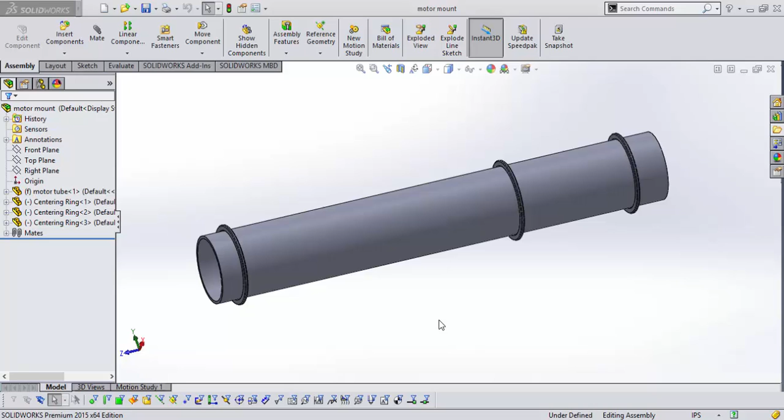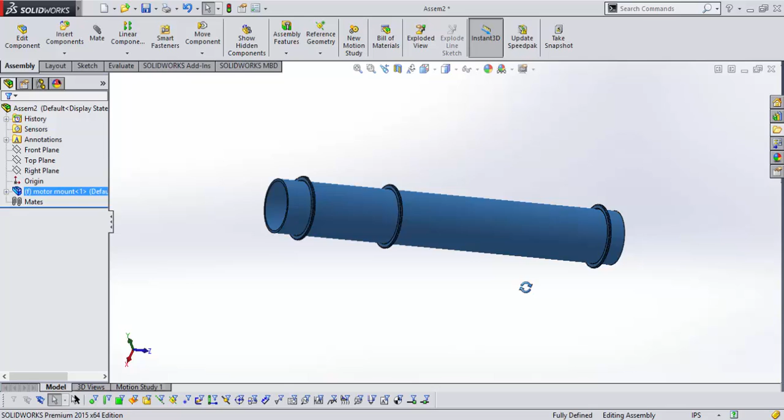Continuing with the assembly operations, we're going to take this motor mount assembly and turn it into something else. You can go to Make Assembly from Part, or in this case, another assembly. This is called a subassembly. When you put a subassembly into a larger assembly file, it acts basically as one part, and you can manipulate it without worrying about the other pieces coming off of it.

So to make this assembly, let's get our back end. There we go. This is the back, this is the front, and we're going to make this assembly called aft section.

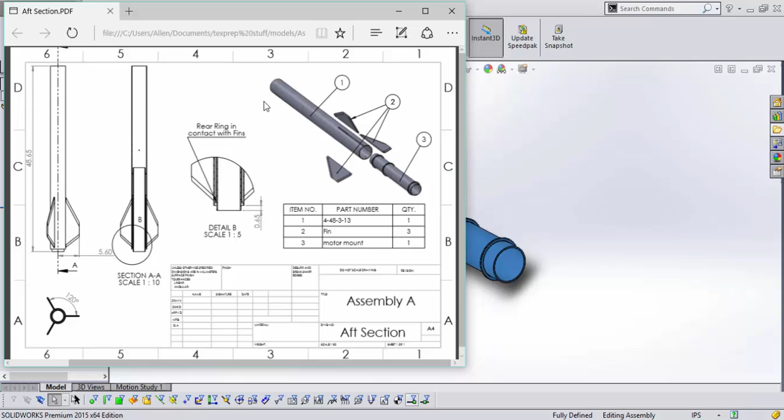Now you should have an idea of what this is going to be. We have an exploded view here, which I'm going to show you how to create, a detailed view showing where things go, and a couple front views. This is a front view, this is a bottom view to show the fin placement, and this is a cutaway view where you can see the motor tube, and that's where we get our detail view. Zoom in on that a little. We've got notes here telling us how this thing goes together, like imagining you got this in a kit and wanted to put it together. That's the same way you make an assembly.

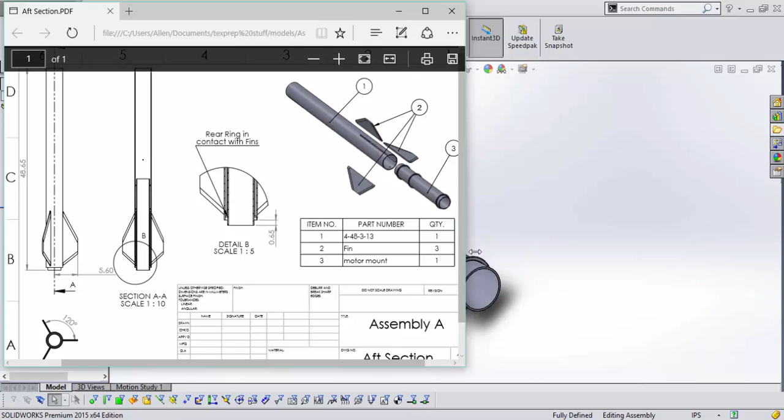So we've got this, and we're going to need some parts. What parts do we need? We need this, which is the body tube part, three fins, and a motor mount. Let's open those up.

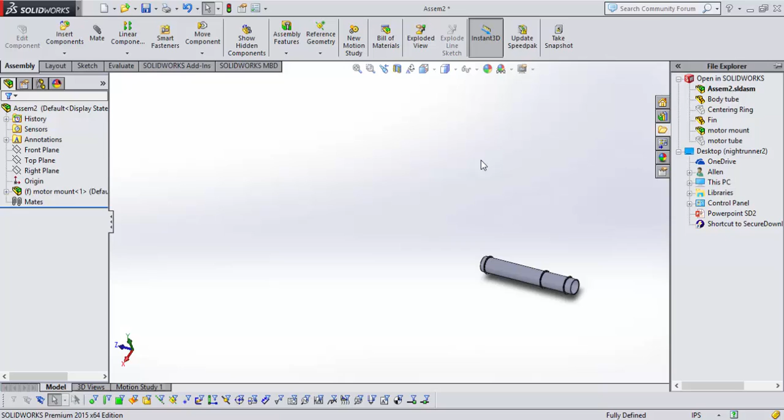So we need a body tube and we need fins. I'm going to hold Control and select both to open them. Got one, got two. Go back to our assembly, drag over the body tube and the fins. Now I'm not going to drag in three more fins for a specific reason, and we'll see why. First off, let's get this concentric with this.

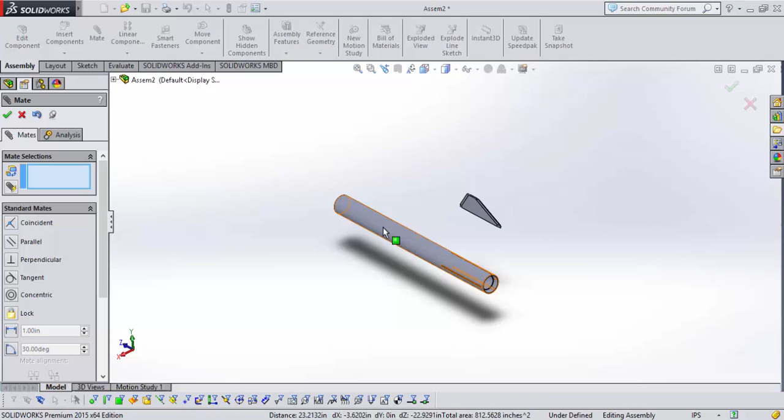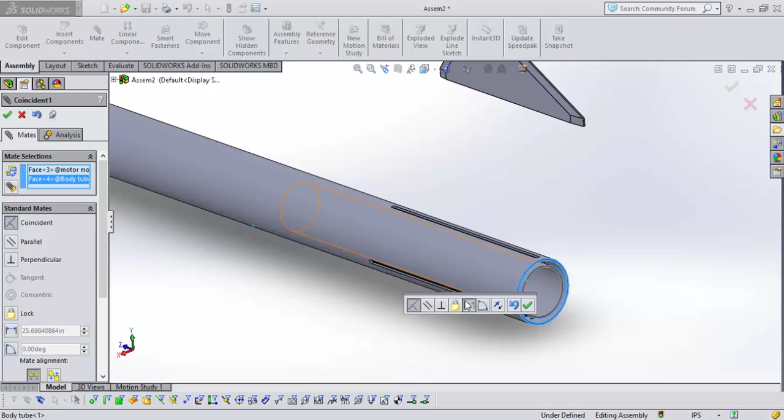That's good. Now to get this in here, what does our drawing say? 0.65 inches. So this is going to be another distance mate, this backside with this backside, 0.65.

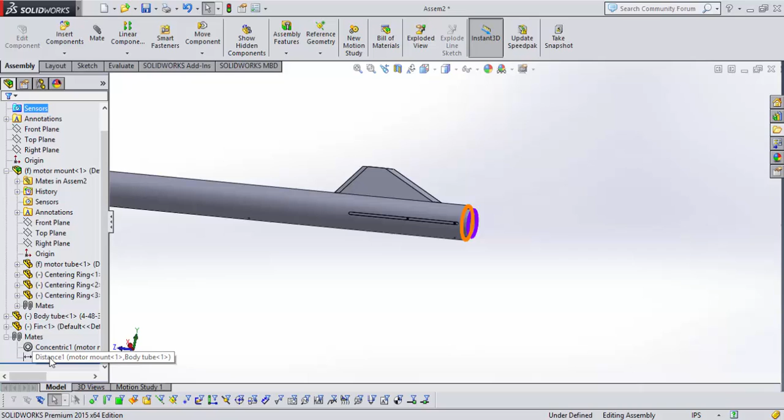There we go, the motor tube is sticking just a little bit out the back, which is what we want. If you'll notice, we have these centering things in here, which means it's in the wrong position. So go to our mate — it's very easy. We can delete this mate. All your mates are found in this little paperclip dropdown here. We're going to edit this concentric mate and flip the alignment.

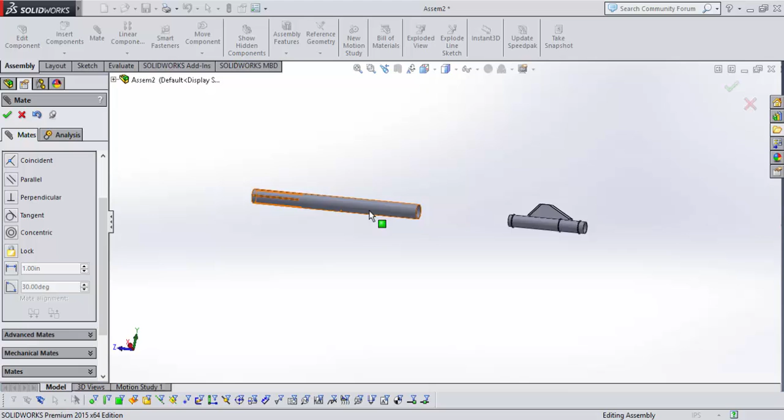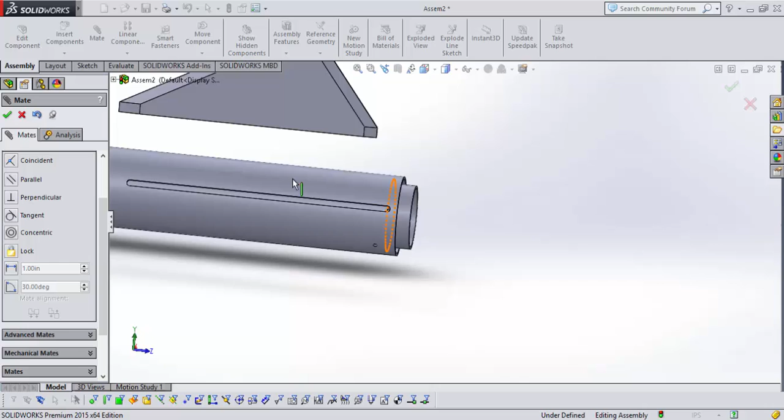That'll do. I'm just going to drag this over, and we're going to redo that mate: backside, backside, distance, 0.65 inches. Our fin windows don't have anything interfering with them. There's a little bit right here, which we're going to use.

So we're going to put this one fin in. I'm going to select that back side and this flat side of the centering ring. That's going to be coincident.

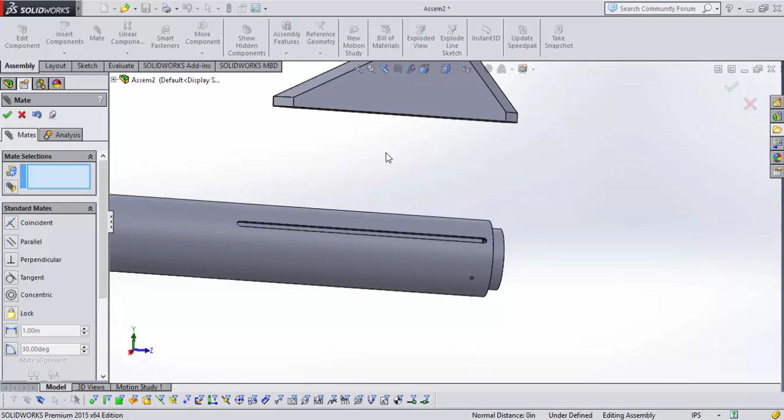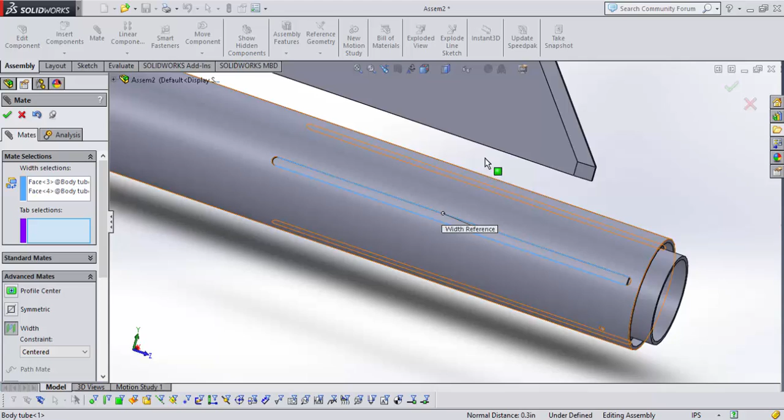Perfect. Now we're going to do something called a width mate — this is an advanced mate. Here they are. Select width, and it wants two width selections: this side of the slot and this side of the slot, then two tabs — this side of the fin and the other side of the fin. Now this fin is perfectly centered in that slot.

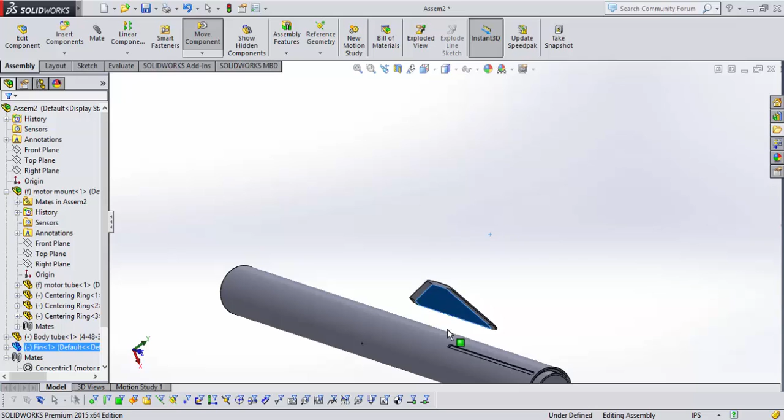And if we just look at how it's moving here, you can only pick it up and rotate it, but it's not going to leave that slot. How do we get that against the motor tube? Well, now we select that side and we select the face of the motor tube.

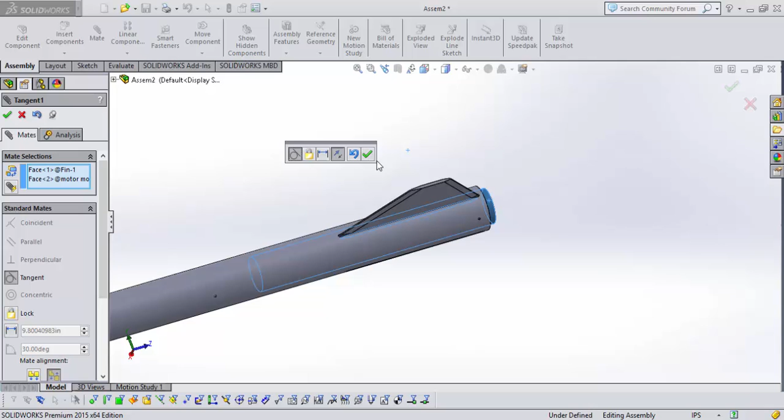Go to mate — mate is here in the assembly tab, there's another way to find it too. The only available mate is tangent, so we're going to say yes. And now our fin is completely stuck there, we can't move it around. This is just a little rotate.

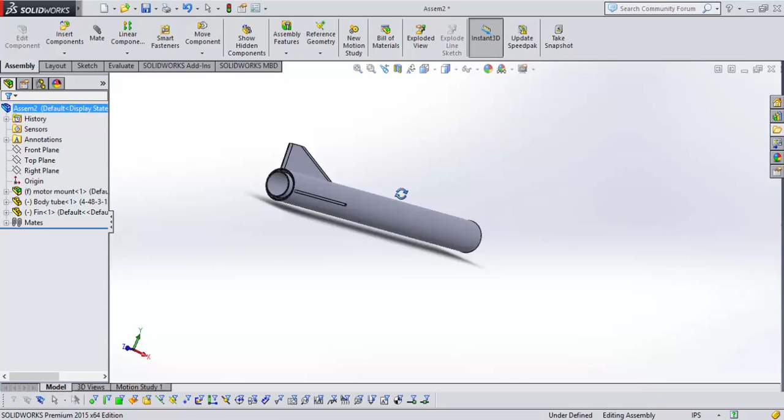Just to lock that down, this is the original part — it's not going to move, but in order to lock this down, we're going to take the plane of the assembly, any plane.

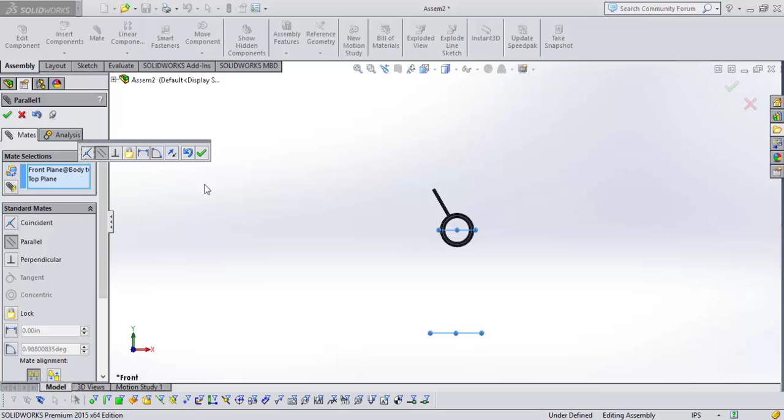Okay, let's select the top one. We're going to do a body tube and go to its planes. Let's select the top one. Make sure you hit Control, hit Mate, and they're going to be parallel. That way those two planes are locked in position and this can no longer move. That can't move, that can't move, that can't move. There we go.

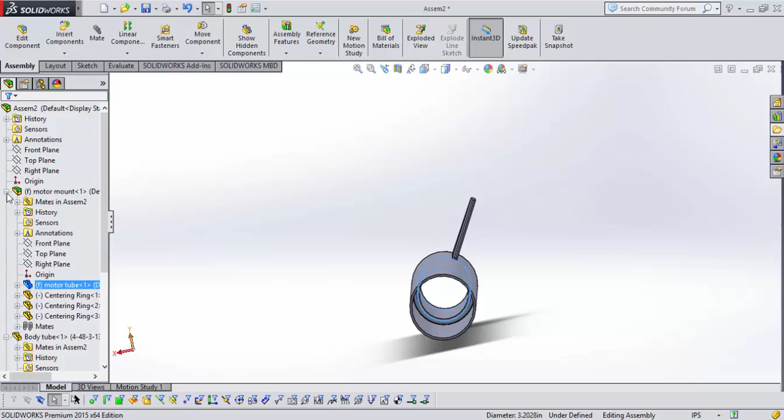Nothing's interfering with our little holes here. And we have one fin. It took 3 different mates to put that fin in position, and we have 2 more fins, so that would be a total of 9 mates if we were to do it like that. But we're not going to.

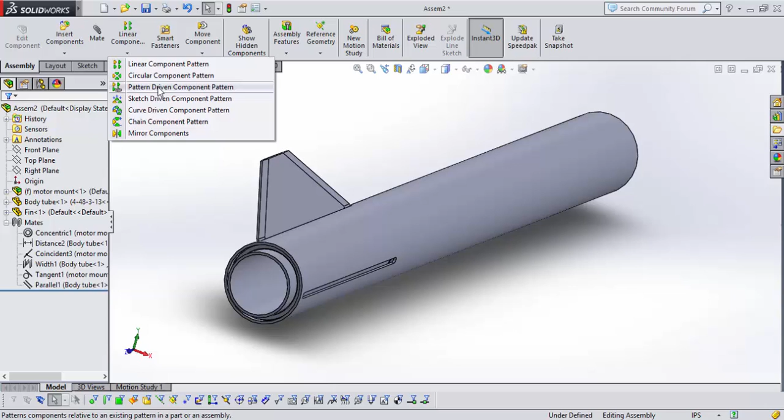We're going to use something called an assembly pattern. When you go to assembly, we have linear component patterns, circular patterns, and other patterns, just like a sketch pattern or a feature pattern. We're going to select circular component. Our axis is going to be around the tube. We want 3 fins, and the components at equal spacing is going to be the fin. And there it is. 3 perfect fins in their slot.

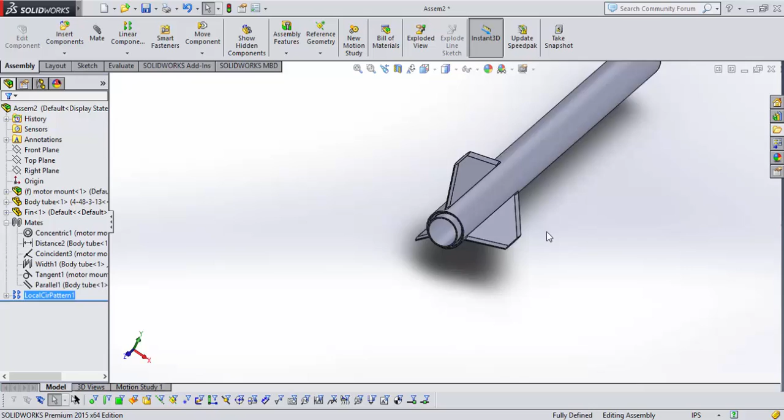All ready to go. As a component pattern, you could make, if you really wanted to, a linear pattern of fins, but we're not going to do that. It's just what a linear pattern looks like. Yeah, that's ugly. Get rid of that.

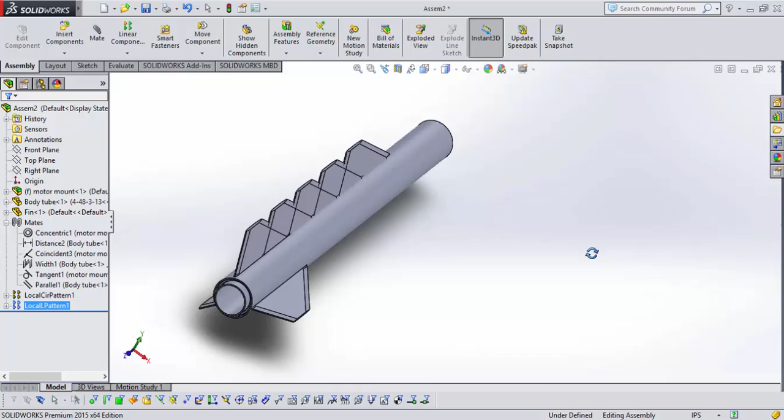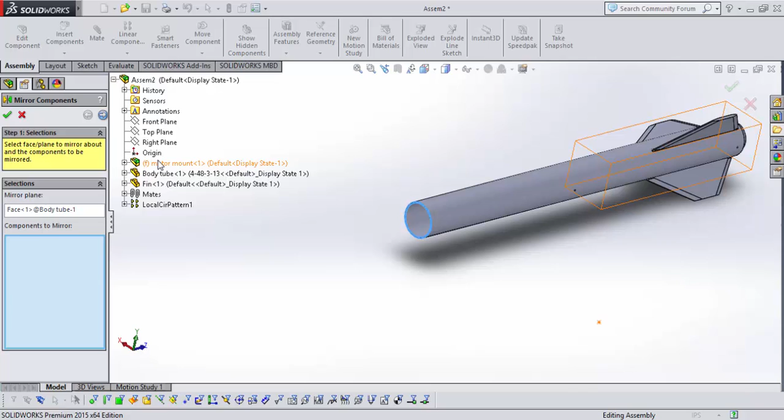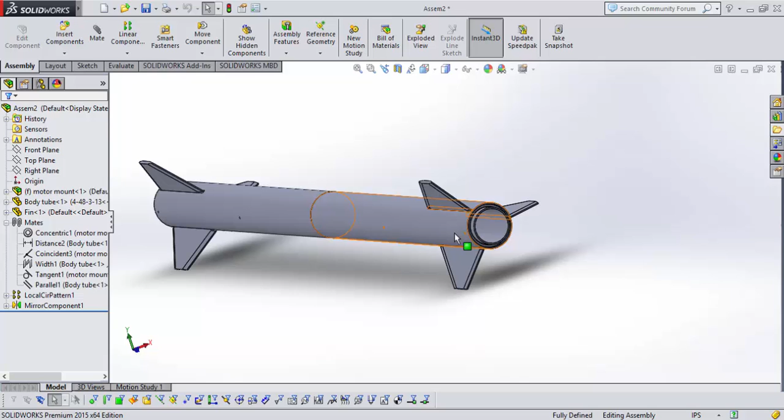And there are some more advanced options, including mirror component. If we wanted to mirror components, say our mirror plane is going to be this, and the components to mirror would be... there we go. Now all of our components are mirrored. So this is not what we're going to do for this assembly. It looks kind of weird. If this is a rocket, it's not going to go anywhere fast. But if you ever have to do half a model and then just want to create the same half mirrored, that's how you do it with mirror components. Let's get rid of this.

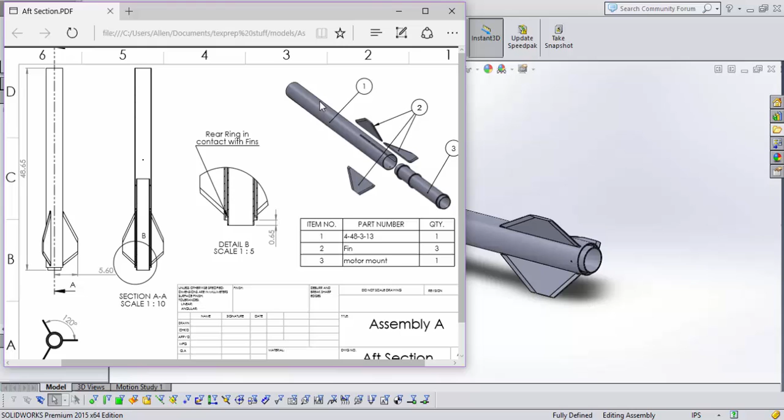Yes, there we go. So we have this aft section. If you look at this drawing, we have some cool views here, including this exploded assembly view. I'm going to show you how to make an exploded view. If you go to this little tab here, it looks like a little tree. It's called the Configuration Manager. This is the default configuration.

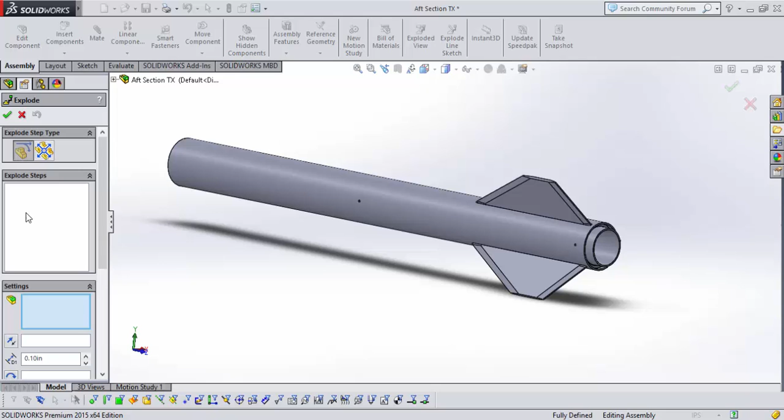If you right-click and say New Exploded View, you'll get a little menu with explode steps. I'm going to click this motor mount, then the fins, and now I have these little coordinate systems, so I'm going to drag on this arrow. And there we go, I've just pulled them out. But wait, I thought everything was mated. They are mated, but this is an exploded view.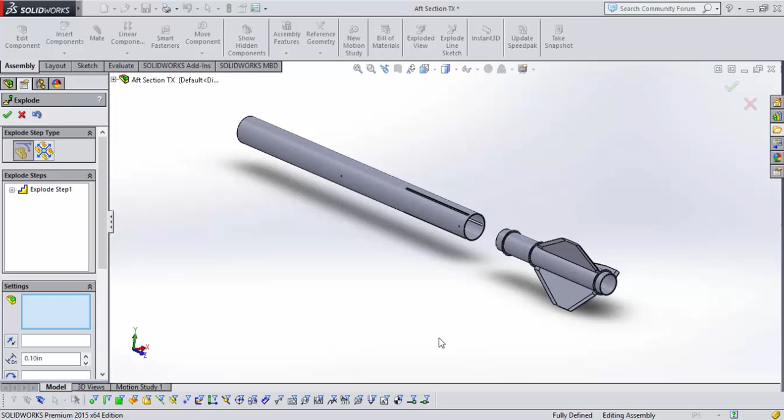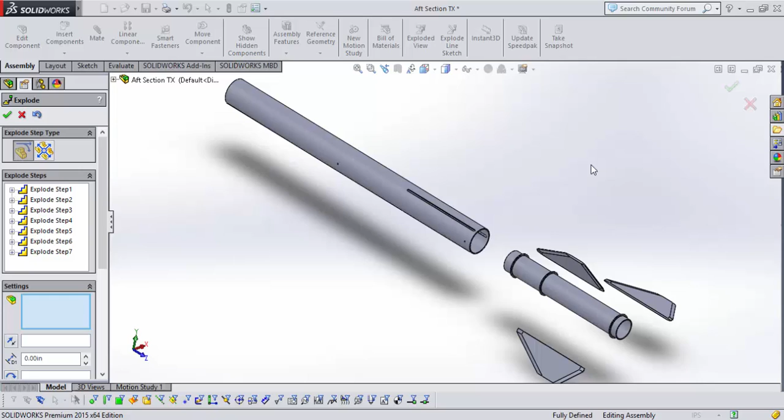I'm going to select this fin and pull it out a little bit and down a little bit. This fin, I'm going to pull it up a little bit and over. This fin, I'm going to pull it over a little bit and down. So now we have what's called an exploded view.

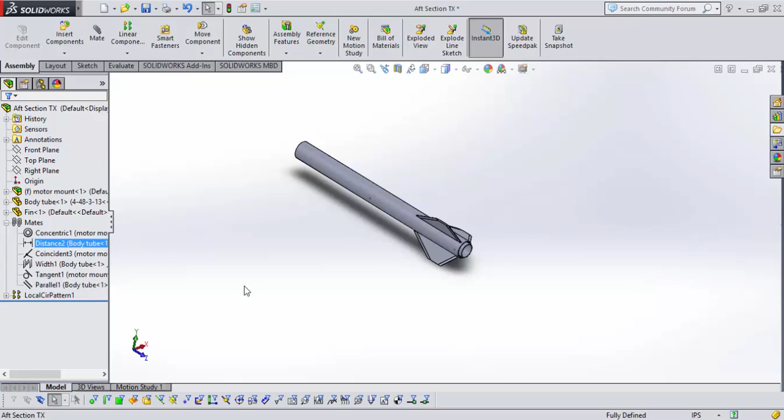And if you think that ruined all the mates, it didn't. Just double click exploded view and we're back. Exploded view, regular view, there it is. When you go to make an assembly drawing, you can use an exploded view to show all the parts that are in there. And all of our mates are still here. Nothing will move, but now we have a cool exploded view.